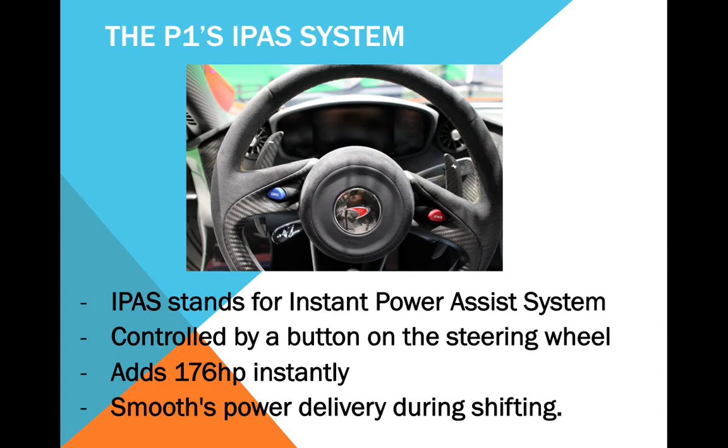So basically, the mechanical system is pretty simple. It's just an electric motor generator bolted right to the side of the engine, and then it's driven by gear right to the flywheel where it combines power with the twin turbo V8, and it sends it to the transmission and out to the wheels.

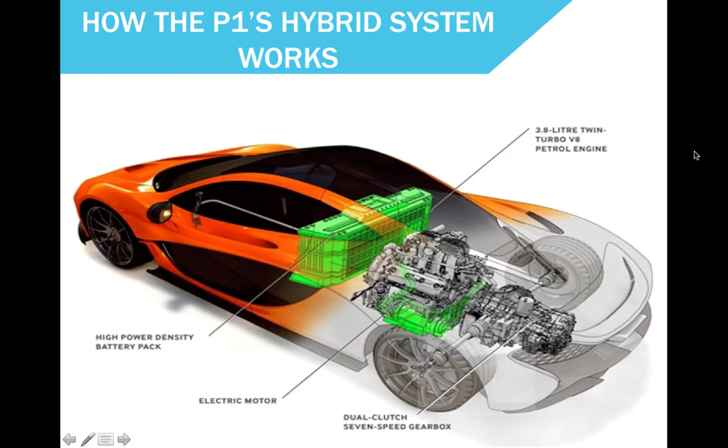So there's a couple methods of charging the P1. First would just be what you would normally think of with a hybrid, just plug it into the wall. The normal charging time is 2 hours for a full charge, but then they have this crazy pit lane charging box thing, which takes only 10 minutes. But either way you do it, even with a full charge, it's only going to last 6.2 miles on full electric mode. So McLaren really wasn't planning on having people drive around just in electric mode.

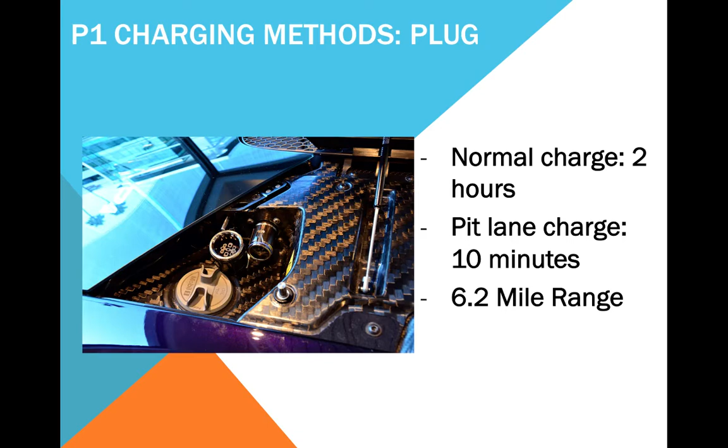So another charging method is basically every time you let off the gas, you're coasting down, it sends that rotational force through the wheels, back into the transmission, through the flywheel, then over to its motor generator where it charges the battery from there. McLaren decided not to go with regenerative braking like many others have because they thought it affected brake pedal feel and they wanted this to be a true driver's car.

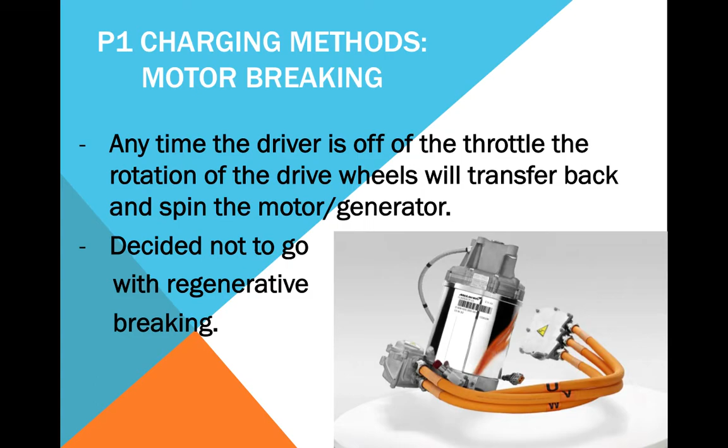It was actually pretty difficult to find information on the P1's battery, but I found out that Johnson Matthey Battery Systems made the McLaren's battery. So I went on their website, dug around, found a battery that fit all the specifications that the P1 had that I could find, and this is what I found. It's a 324 cell lithium ion battery. They definitely favored power density over energy storage, that's why you get this 6.2 mile range. And they located it upright behind the passenger seats and in between the engine.

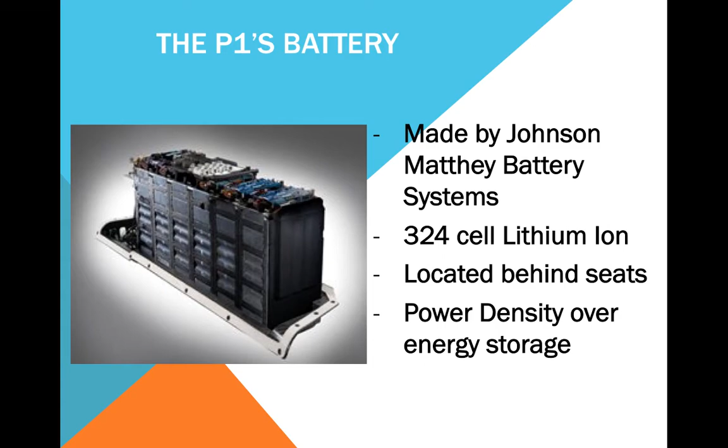So, quick review of the LaFerrari before we go into detail on that. Cost 1.4 million, so 100,000 more than the P1. Has a combined horsepower of 950 with its V12 engine and electric motor. Can do 0 to 60 in 2.5 seconds, 0 to 100 in 4.8 seconds, and it has a top speed of 218. They produced 499 of them, which really bugs me. Should have produced one more, but whatever.

Okay, so their hybrid electric system is called the HY-KERS system, which stands for Hybrid Kinetic Energy Recovery System. This system is actually pretty cool. They have an electric motor mounted to the back of the transmission, the opposite side of the engine. So the transmission actually has two inputs, one from the engine and one from the electric motor. They based this off of the Formula One KERS system, which was the kinetic energy recovery system. And they also added an electric motor generator in the place of an alternator, which I'll talk about on the next slide.

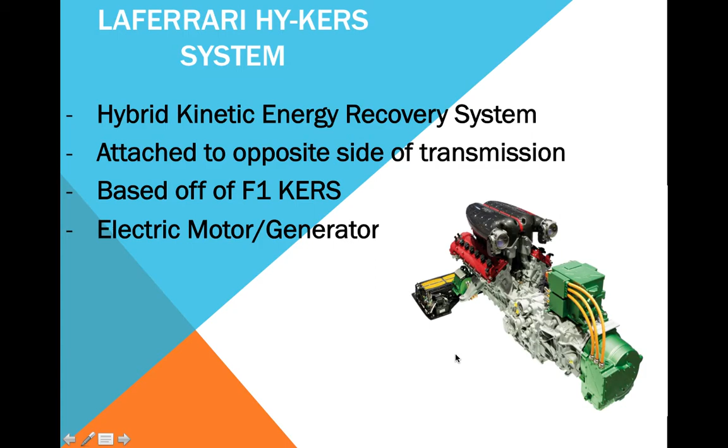So, one of the charging methods is that electric generator alternator thing. They use this when the engine is making extra torque and power that they don't need going to the wheels. It takes this opportunity to use some of that and charge the batteries. Examples of when this would be is like under hard cornering, when the traction control is kicking in, just basically when you need less power to the wheels. It's going to take it up, charge the battery a little bit.

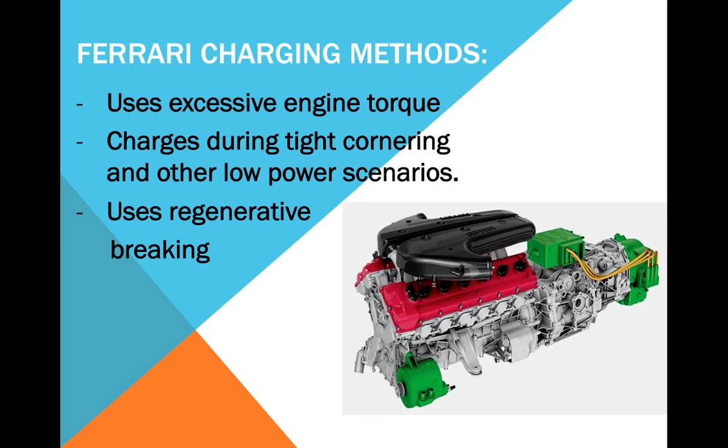Ferrari also decided to do regenerative braking. They figured it was worth the little less brake pedal feel for a solid charging system.

The LaFerrari's battery is a 120 cell lithium battery, weighs 132 pounds, and it's located below and behind the seats. Their battery is a lot flatter, lower, and lighter than the P1's battery.

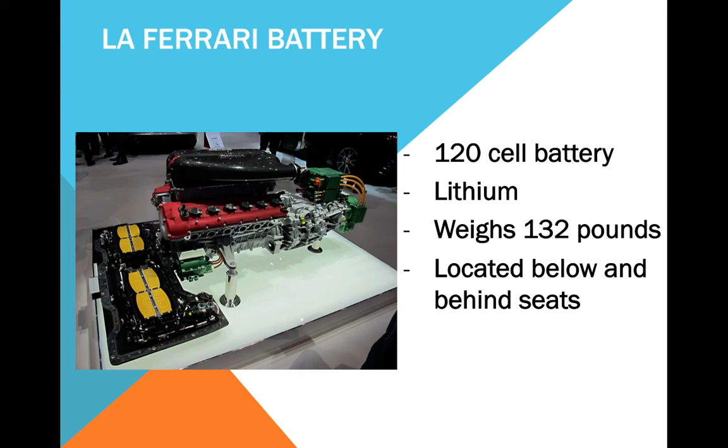I hope you found this information interesting.